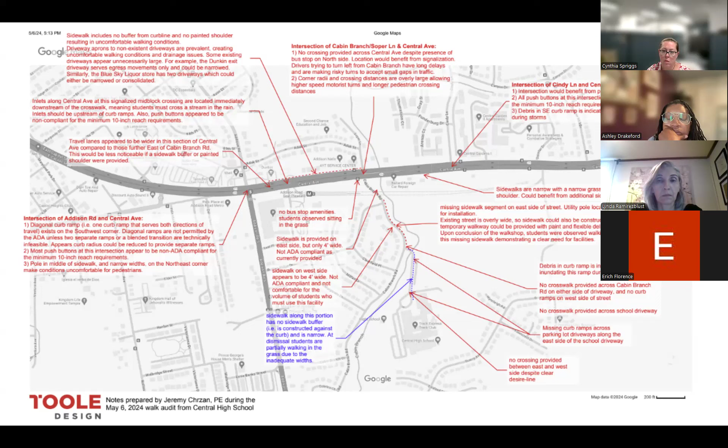A 4-hour training of transportation professionals. I was able to provide that to MDOT, SHA, and Prince George's and Maryland National Capital Park and Planning staff. And then one of the trainers, Jeremy Chrzan, was also able to join us for the walk as well. These are his notes, from a very experienced transportation designer and planner. They're worth looking at in some detail, but we're not going to read them here.

So starting, we walked down from the school, and the first big spot, I have a sort of images of both us coming and going. We have Chinita, she's the track coach, she's got her arm raised in the air on the top right. And James Harper was someone who really wanted us to focus on this crossing. I didn't take good enough photos, I don't know if other people want to make some comments about this.

There's no crosswalk here, which is sort of the obvious problem, but I just wanted to invite other people who participated to share what their observations were for this site.

I'll speak up. One of the things I noticed, you walk out, it's a school, obviously a high school, different from an elementary, but there's no crosswalk. It almost seems open with no safe place for them to travel at all, even when they cross the street. The way they can cross isn't a safe distance to look and see, especially knowing vehicles aren't traveling at the speed limit. So they have to get across the street where sidewalks are available, but not directly across.

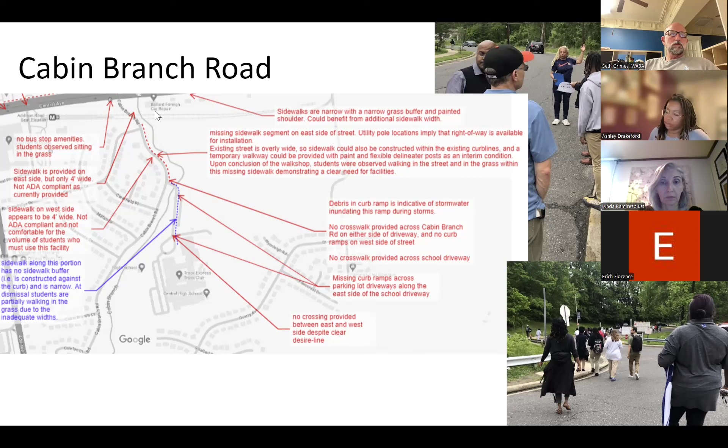And I do apologize for being a little late, it's just been rough today. Well, thank you for joining us, appreciate it.

Yeah, so a lot of problems at this site. Let's see, hold on. Here's another site, starting with the school, and I circled the site on this map. So the list of problems we found: there's no sidewalk on the east side, there's no crosswalk from the west sidewalk to the school drive, the road is overly wide - it's a neighborhood street but very wide, and there's no buffer for the sidewalk, the only sidewalk doesn't have a buffer all the way.

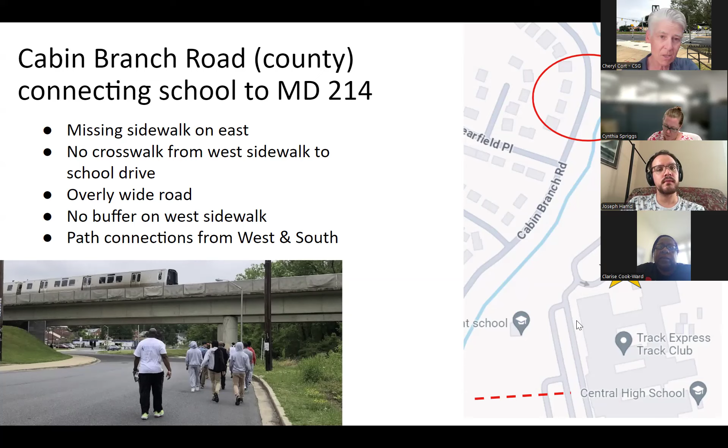I actually added this one at the end, and I want to point out this red dot here. Something from talking to planners today about it - did people talk about other connections to come in the back way to the high school? We understand there are informal trails across the land owned by the Board of Education, so it's actually publicly owned land. I wonder if I can show you a different view. Okay, so if you look here, here's the school, and you can see there are going to be some kids coming from here, right?

So the connectivity is pretty awkward, having to walk all the way down and then back up, when you could cross a stream and come in the back way to the high school. So we just wanted to flag that.

And I understand there are some past... Linda, did you have any knowledge of that? Or does anybody else have any knowledge?

Yeah, actually it was something I mentioned to Elena. Because I parked in the parking lot close to the auditorium, I observed some students, once school let out, cutting through the parking lot and cutting up the hills. It made me wonder if there were other pathways, so I was talking with Elena about that. We've not gone back out and done our own investigation, but I expect there are some desire lines, if not some marked trails, that people are using to cut through to get into the school.

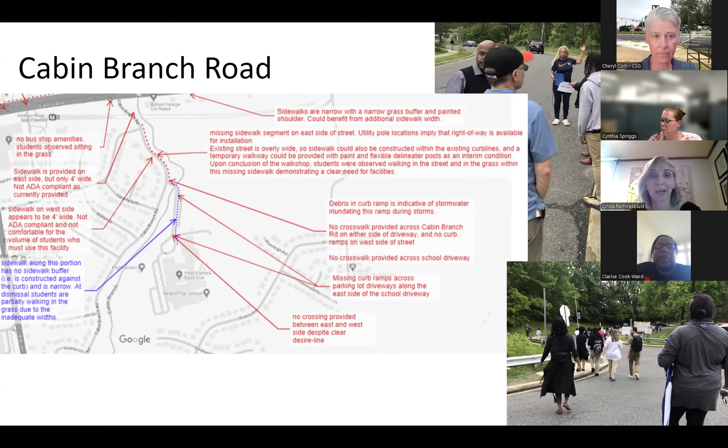They don't want to have to go all the way down Cabin Branch and then come back up. Right, okay, great, thank you.

So moving on to the intersection of Maryland 214 and Cabin Branch Road. Cabin Branch Road is a county road and Maryland 214 is a state road, so at that intersection everybody needs to work together.

These are some images from when we walked. I think this is a dirt path on this side, is that correct? Yes. Okay, so there's a desire line there, a dirt path, because people want to walk on that side of the road to get to the high school.

And then these are the three legs of the crossing that I wanted to flag. If you lived up the hill here, you might want to cross here to get to school. If you took the bus and it dropped you off here, you would obviously want to cross the roadway.

Right now these are very soft corners, meaning a turning vehicle could take it at a pretty substantial speed. And it's a six-lane highway here, and there's no signal, not even a crosswalk. There's very little support, or no support at all, for high school students crossing who are taking the bus every day to get to Cabin Branch Road to go to their school.

Do people have observations about this intersection? I've noticed some of the children, they walk and they have to run across to make sure they get across safely. Yeah, and cars do not slow down.

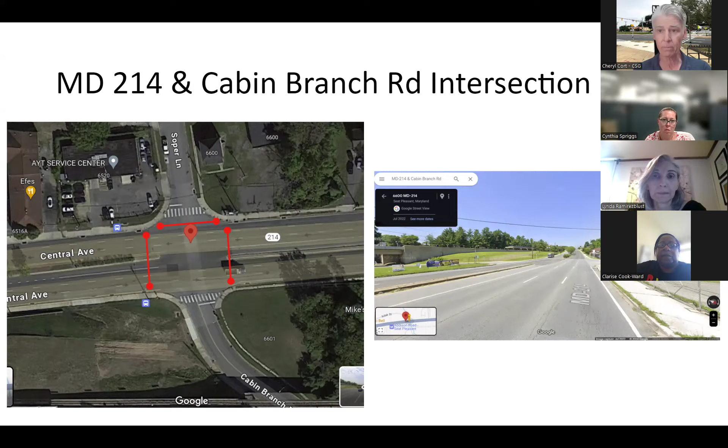And kind of the list that I came up with, based on some people's comments and also from Toole Design, was: obviously there's missing sidewalks, there's no signal. And one of the things that Jeremy, the transportation planner from Toole Design, pointed out is that this lower photo shows there's awkward turning into Cabin Branch.

You can see that basically signalizing this could improve safety and help manage traffic as well, to get safer interactions between people who are crossing and turning vehicles.

But we still have overly wide roads with high speeds. There are no bus stop amenities. When we came out here, there were lots of kids waiting at this bus stop at the end of the day. There's obviously a very large turning radius so that vehicles don't have to slow down to take the turn, and that lengthens the crossing distance this pedestrian is navigating.

I'm talking about the same intersection. I don't know if there's any other thoughts that people have for this intersection.

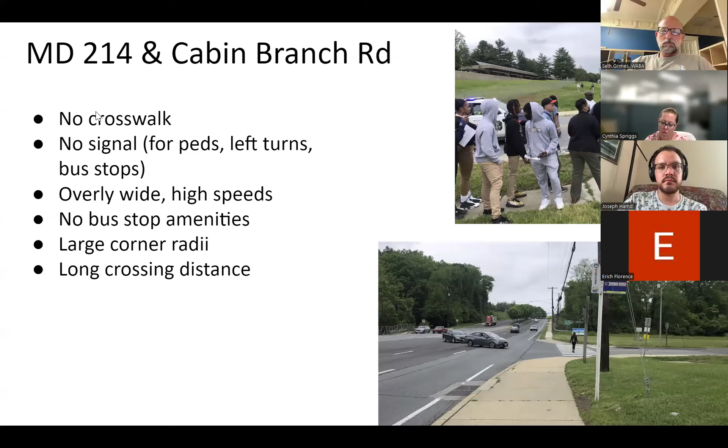They kind of normalize it, they don't really truly understand, perhaps. They know obviously crossing the intersection is really hard for them. But as we were walking through, I was taking note of how fast the buses were driving by, how fast the cars are driving by. And when I asked them about it, those were things that were kind of normal to them - something they've internalized.

So really pushing them to understand, hey, you shouldn't have to sit down at the bus stop on the grass, or some of these sidewalks should be a little bit bigger.

So yeah, I wanted to recognize that Delegate Kent Roberson has joined us, and if Delegate, if you wanted to say a few words of introduction - I know this is your district, and in fact I believe you have a son who attends Central High School.

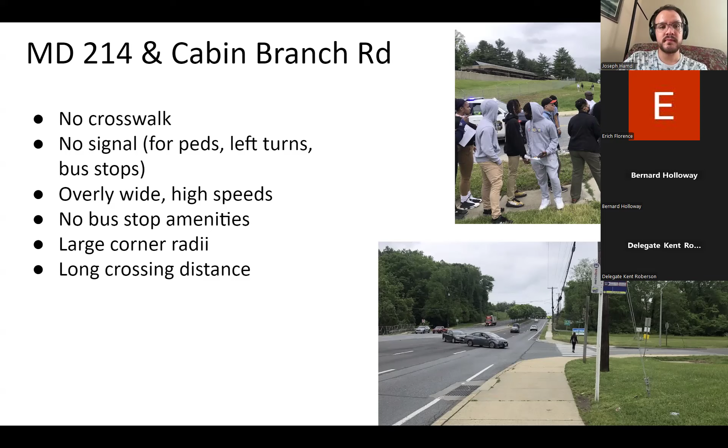Yes, thank you so much. I apologize for being off camera as I'm driving my son now from an eye appointment, but I appreciate this opportunity to join you all and be looped in on the conversation, which is an issue I've been flagging for my staff for a while, and I'm just glad that us as the community were able to come together on this. So happy to lend my support and help in any way that I can, and so glad that we're finding ways to collaborate to resolve this issue. Thank you once again. Great, thank you so much, Delegate, for carving out the time however you can to participate, and we appreciate that you were able to join us for the walk as well.

Okay, so let's see, we sort of covered this - students talked about cars driving fast and too close, narrow sidewalks, and no bus stop amenities.

Basically - Clarice, did you want to say something? Most of our children don't really cross here, I guess because it's too far away from the school. But the few that do also echo the sentiment about crossing further down - how fast they have to run to get across the street.

And I'll note that this area with this 6-lane highway actually has a posted speed limit of 30 miles an hour. But when we did our workshop, the SHA shared data - and I didn't see it written down, but they said that the 85th percentile speed, kind of what most vehicles are moving at, was 58 miles an hour. So obviously way too fast.

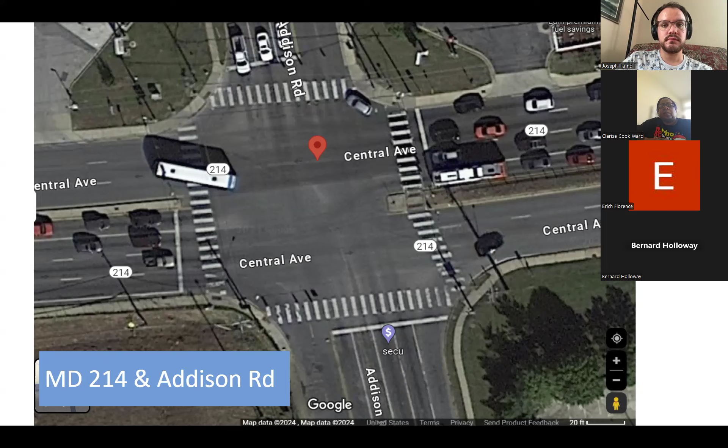You could easily get by with 4 lanes. This is another view of the intersection.

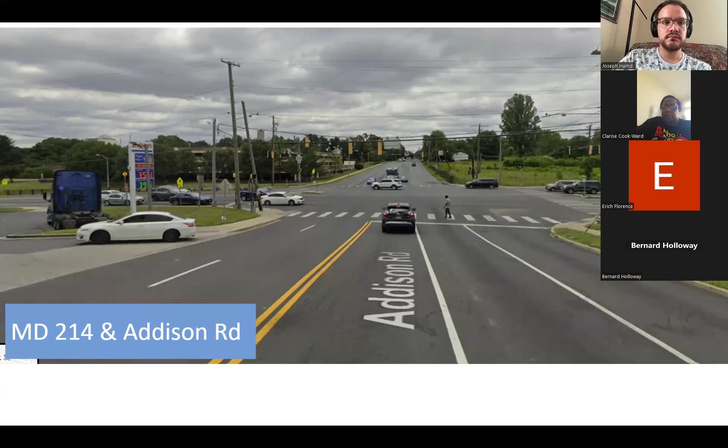Now, Addison Road is a county road, not a state road. So any kind of tightening up that intersection is a collaboration, a sort of working things out between the state and the county.

So just kind of in summary, we did spend less time on this intersection. But it's an overly wide roadway. It has 6 lanes of traffic really for about 4 lanes of traffic volume. Speeds are clocked in at 58 miles an hour, 85th percentile, even though the speed limit is 30. There are large turning radii, long crossing distances, and if you come on the wrong day, you might have to pick your way around the water like I did.

On this image. Does anybody else have any other observations about this intersection? Fewer of the students are going through here, but people going to and from the metro obviously are moving through this intersection.

One thing that Ms. Clarise Cook-Ward and other students mentioned when we were walking is near the metro there's lots of drainage, and I think Marcus pointed this out in the chat. In the wintertime, from the picture, you can see the metro and how the drainage will go to Cabin Branch Road, a little bit further down, but there's water here. During the winter it'll freeze over, so students are having to run across the intersection and then slipping and sliding on their way to school, which is obviously really unsafe.

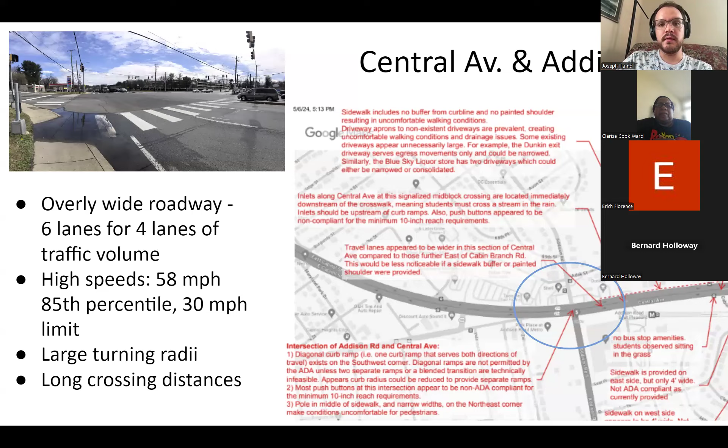Okay, well, based on these observations, I wanted to make some notes about the kinds of interventions that SHA and other transportation engineers are doing to address some of these problems.

So they actually built protected bike lanes. I think the sidewalk looks about the same, but they basically buffered the bike lanes and maintained the median that they had. I don't know if anyone has any experience with this and wants to comment, or we can talk about a couple other interventions.

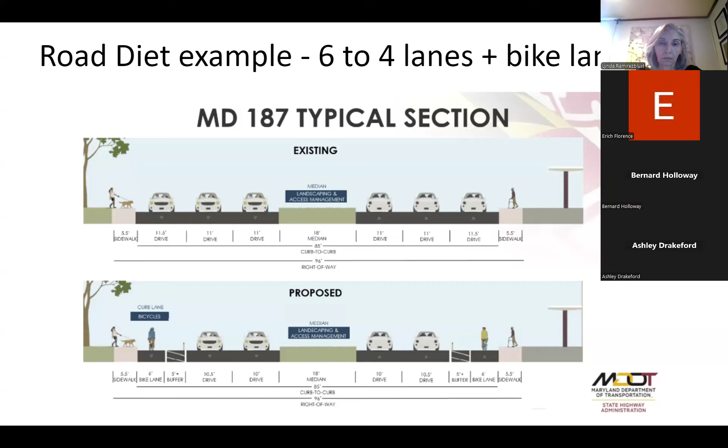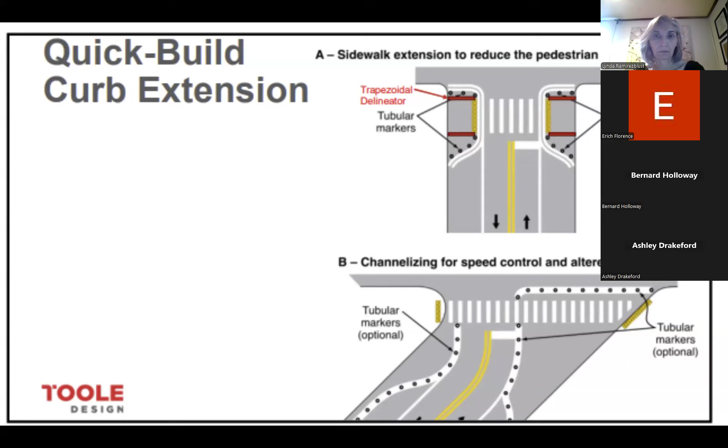This is an interesting example where you see this super wide crossing that's really just for a 2-lane road, basically. This is an image of some of the work Toole Design has done in terms of channelizing these overly wide openings to get motor vehicles guided to the appropriate speeds and tracking for the roadway.

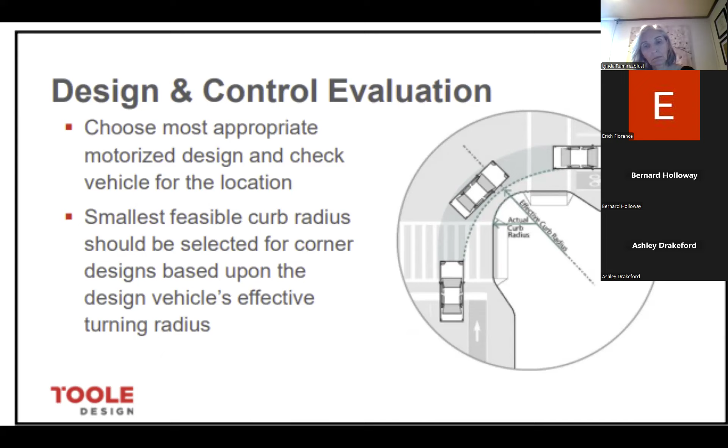This is an example of looking at the difference between the actual turning radius versus the effective turning radius, an interesting concept I've learned more about. This bulb-out is narrowing the crossing distance for the pedestrian and slowing down the turning vehicle, but it actually has a bigger effective turning radius because of the offset of the bike lane. So the vehicle's turning has a wider turning radius, even though from a pedestrian perspective you're getting the benefit of a shortened crossing distance.

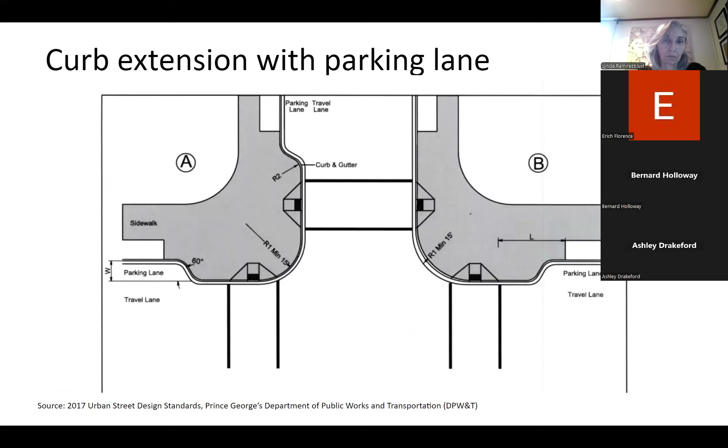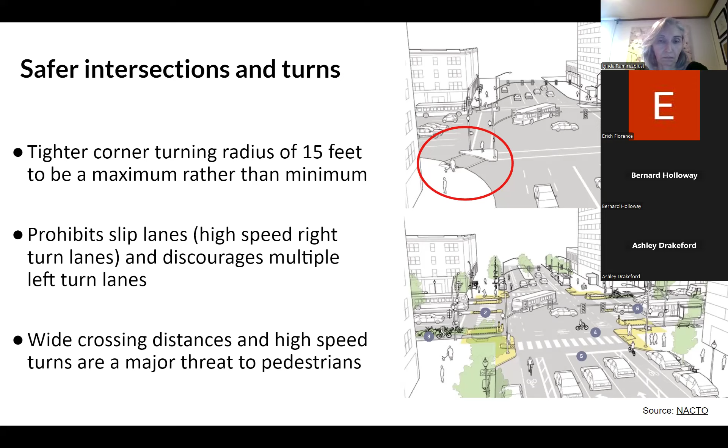Slip lanes are basically designed to move vehicles through an intersection and reduce delay for vehicles. I'm told there are some specific scenarios for certain types of acute turns where there might be an actual need for a slip lane. But in most cases, I think their design is really for moving vehicles and creating a lot of hazards for pedestrians, because pedestrians are given faster turning speeds and more things to cross and track.

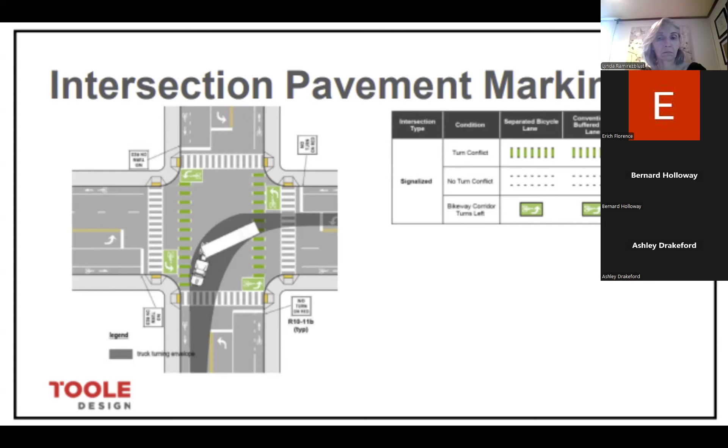And this is just another Toole Design example of how to move a large vehicle through an intersection that you're tightening up, so that it doesn't have those wide sweeping turns, but you can still move large vehicles through it. And that was what I wanted to discuss.

In terms of the walk audit, I'd be interested in a couple of things. I'd be interested if Mr. Florence from SHA has any thoughts, or Cynthia from MDOT, or Lynda from the Blue Line Planning Team. Erich, did you want to make any comments?

Yes, can you hear me? Yes, we can. Okay, so a couple of things about Maryland 214 at Cabin Branch. I know that we're aware of that intersection.

There have been a couple of requests for signalization there, so I decided to follow up to see where that request is, what the result of that study was. I do know that we have one in for 214 at the metro station intersection, and I believe that one was recently approved, for the pedestrian crossing. I think that's signalized, isn't it?